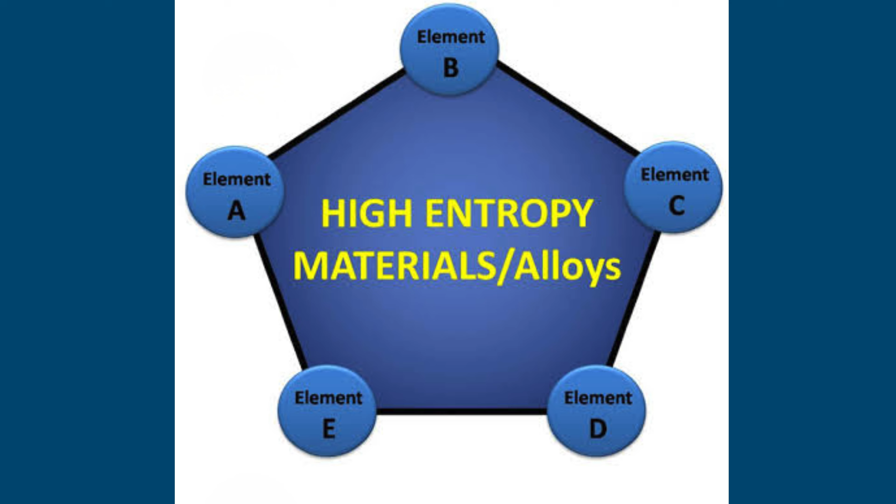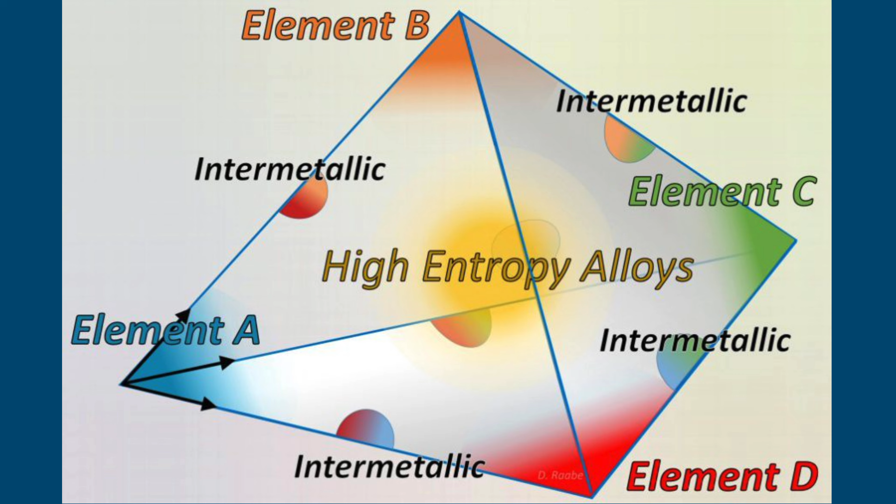High-Entropy Alloys, HEA, developed principally in the early 2000s, represent a different philosophy of alloy design. Instead of using one dominant metallic element with relatively small alloying additions, HEAs generally contain several principal elements, often in near-equiatomic proportions. This compositional complexity can produce unusual combinations of strength, ductility, corrosion resistance, wear resistance, and thermal stability. High-Entropy Superalloys, HESA, combine concepts from both classes, particularly the compositional complexity of HEAs, with the precipitation-strengthening strategies characteristic of conventional superalloys.

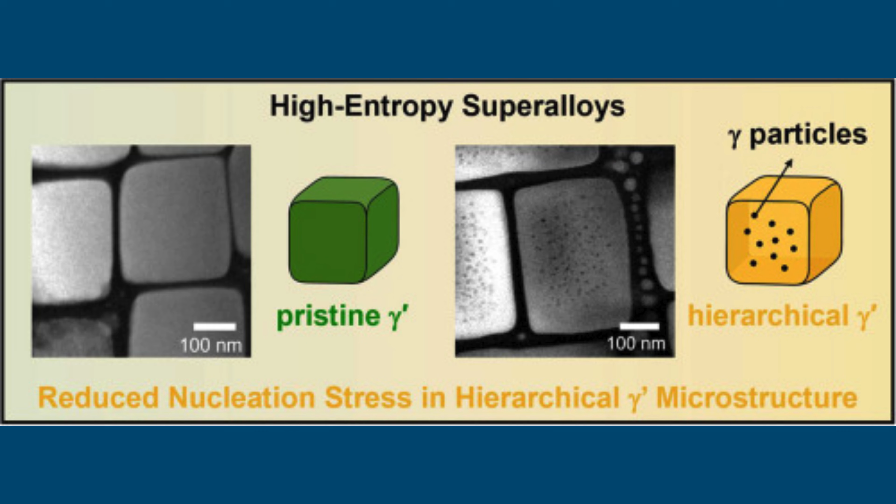Superalloys are commonly classified according to their principal matrix element into nickel, cobalt, and iron-based superalloys. Although their compositions differ substantially, they share the objective of maintaining useful mechanical properties at temperatures where conventional steels and light metal alloys undergo rapid creep or loss of strength.

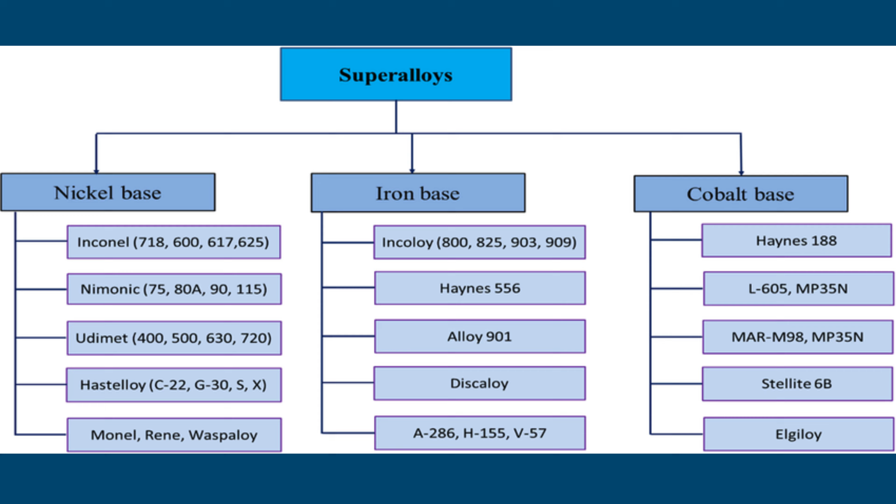Nickel-based superalloys.

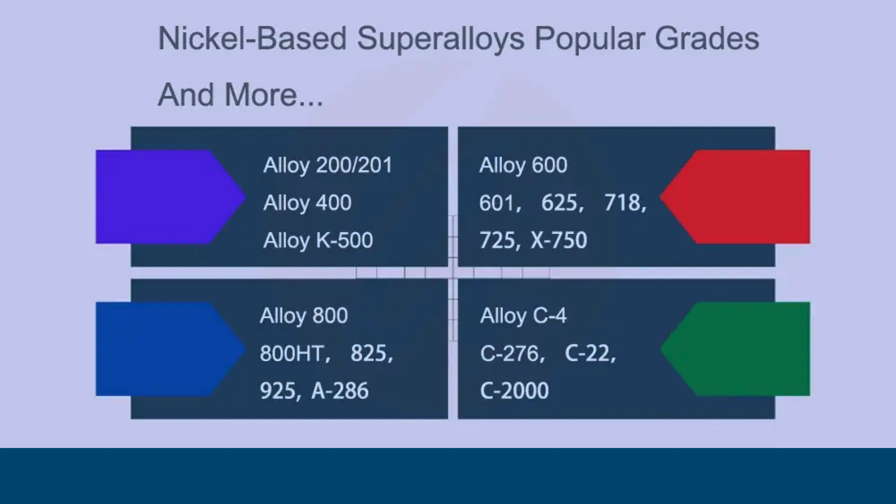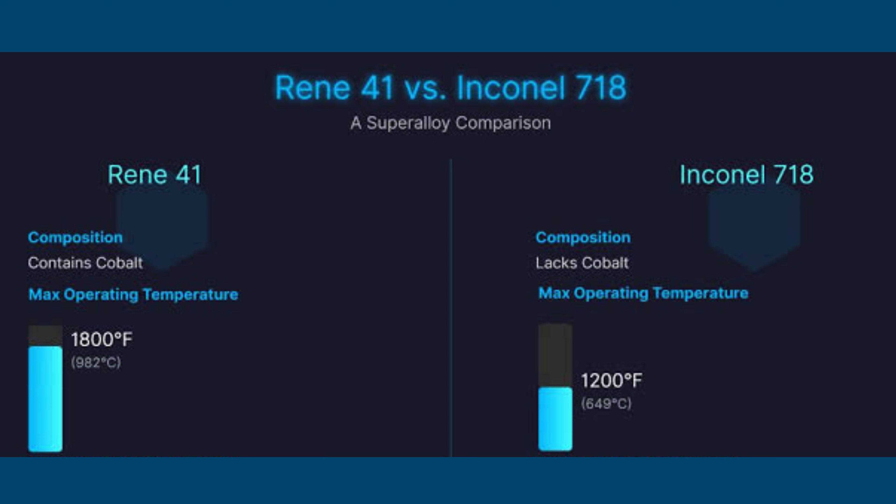Nickel-based superalloys are the most technologically important superalloys and are extensively used in the hot sections of aero engines and land-based gas turbines. Representative commercial families include Nimonic, Inconel, Rene, and CMSX alloys. They can operate at temperatures approaching or exceeding 800 to 1000 degrees Celsius, depending on composition, processing, cooling, and service conditions.

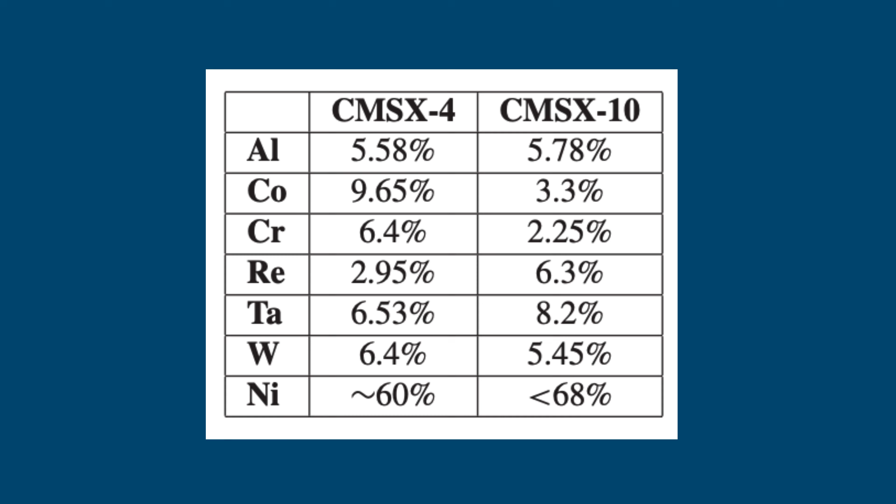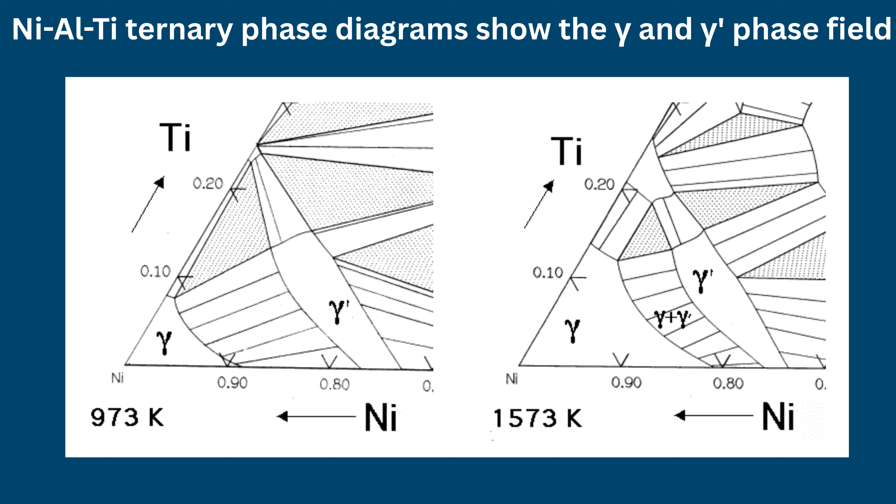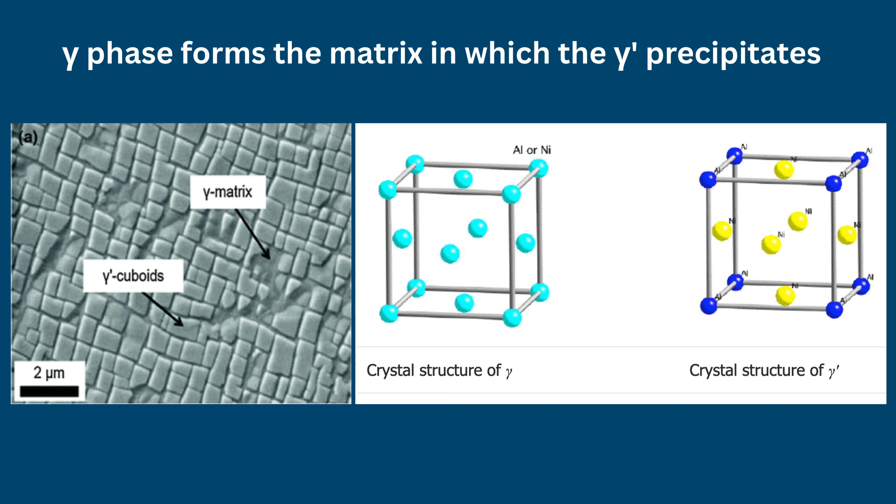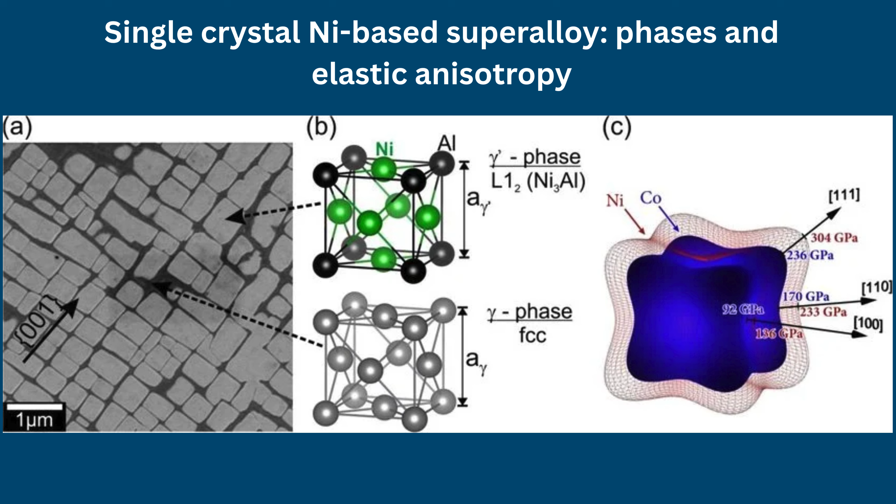The baseline material architecture of a superalloy relies on a two-phase equilibrium. It consists of a primary gamma matrix and secondary gamma prime precipitates dispersed within it. Their exceptional performance originates from a predominantly FCC gamma-nickel matrix, strengthened by alloying elements such as chromium, cobalt, molybdenum, tungsten, and rhenium. The most important strengthening phase is the ordered gamma prime phase, nominally Ni3 aluminum-titanium, which possesses an L12 structure and remains coherent with the gamma matrix.

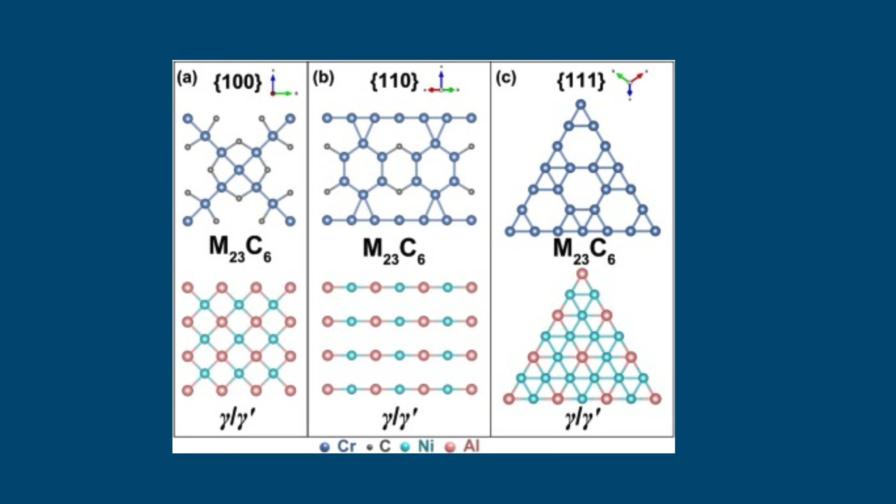In some alloys, particularly IN718, the ordered gamma double prime phase, approximately Ni3Nb, provides major precipitation strengthening. Carbides such as M23C6, M6C, and MC can additionally contribute to grain boundary and matrix strengthening.

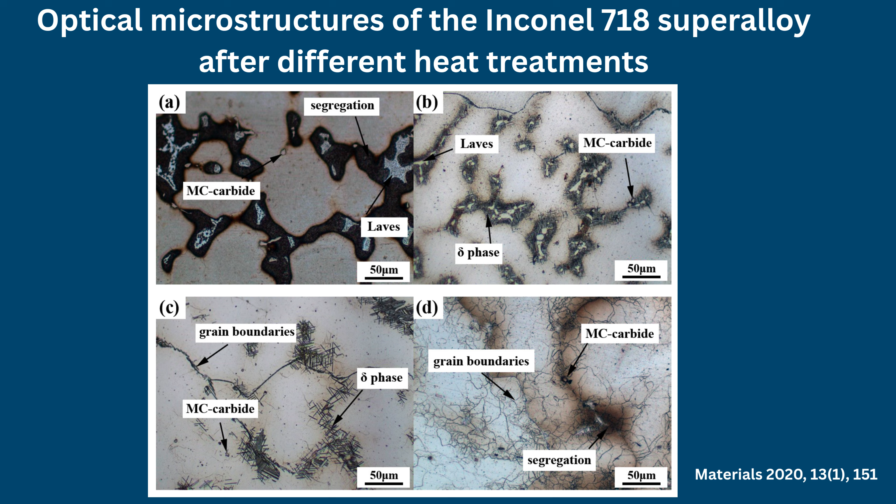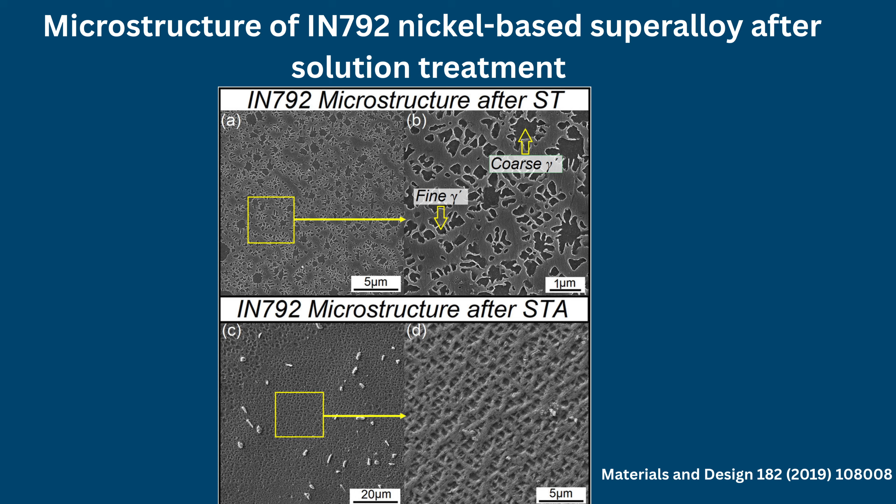The gamma/gamma prime microstructure is particularly important because gamma prime resists dislocation motion and retains substantial strength at elevated temperatures. Modern single-crystal turbine blade alloys exploit this microstructural principle while eliminating transverse grain boundaries, thereby substantially improving creep and thermal fatigue resistance.

Cobalt-based superalloys.

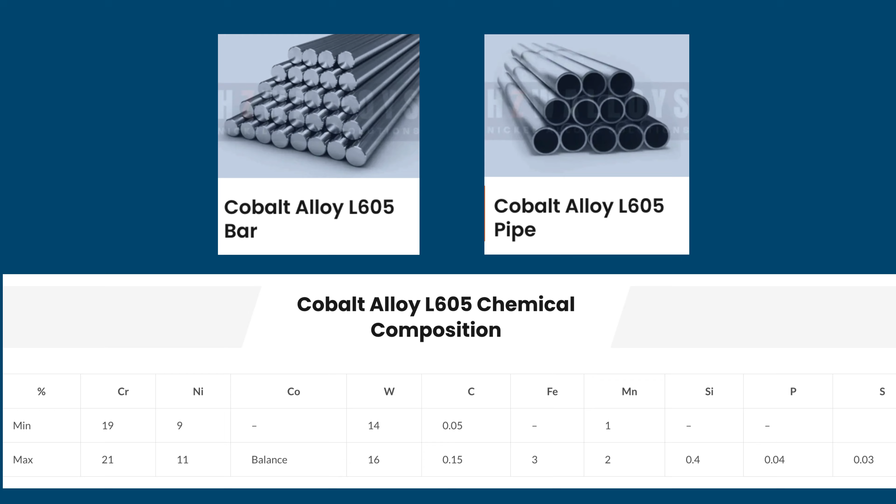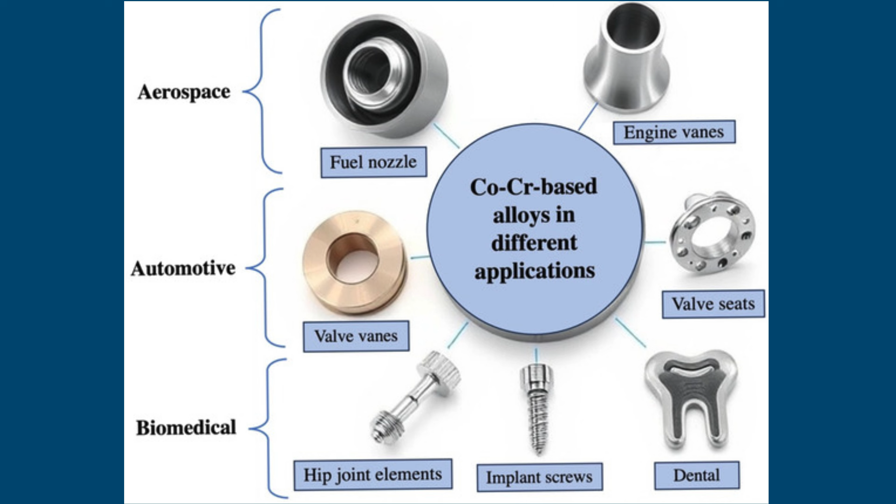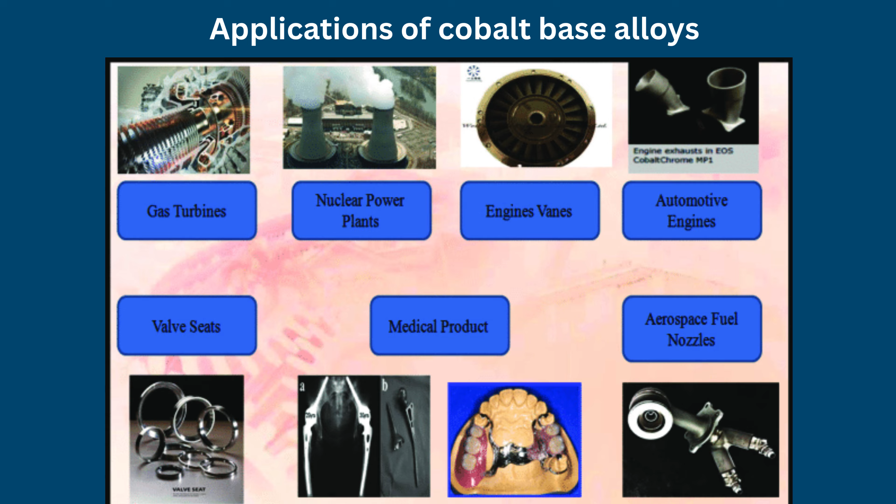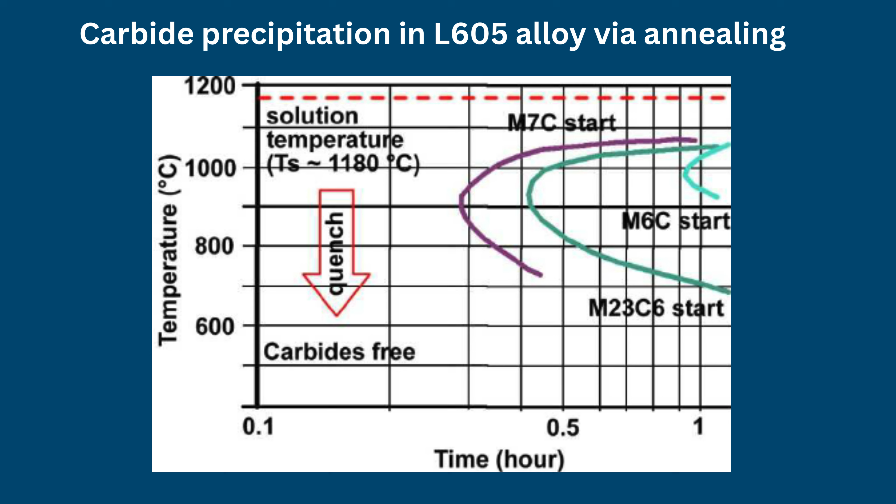They are valued for high-temperature corrosion and wear resistance and have historically been important for turbine vanes, combustion components, furnace hardware, and biomedical applications. Compared with conventional nickel superalloys, cobalt alloys traditionally rely more strongly on solid solution strengthening and carbide strengthening. Chromium promotes formation of protective Cr2O3 scales, while W and Mo provide solid solution strengthening.

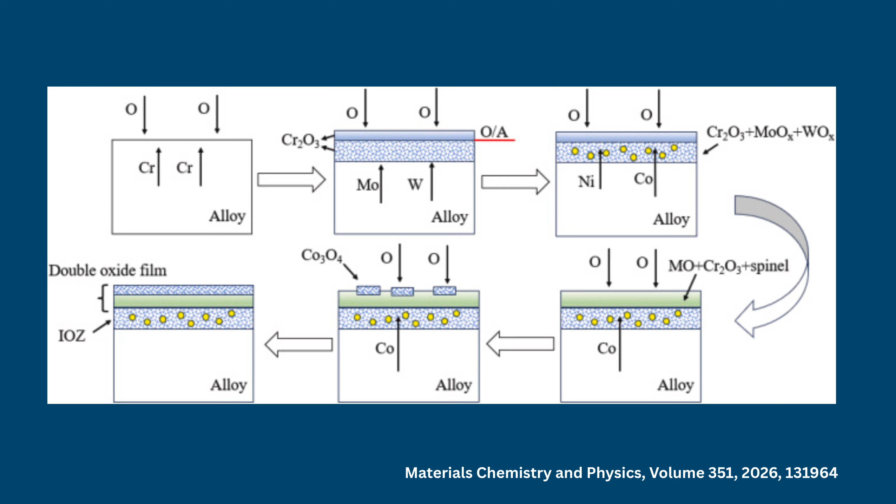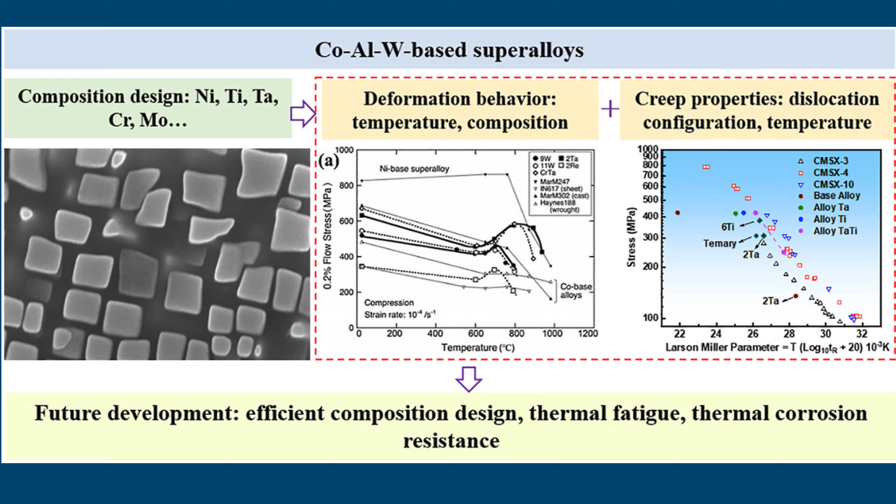Their relatively high melting temperatures and good hot corrosion resistance make them attractive for components exposed to aggressive high-temperature environments. An important modern development is the discovery of Co-Al-W-based gamma/gamma prime superalloys, in which an L12 Co3(Al,W) type gamma prime phase provides precipitation strengthening analogous to the gamma/gamma prime microstructure of nickel superalloys. These alloys demonstrated that the powerful precipitation strengthening concept of Ni-based superalloys could potentially be extended to cobalt-rich systems.

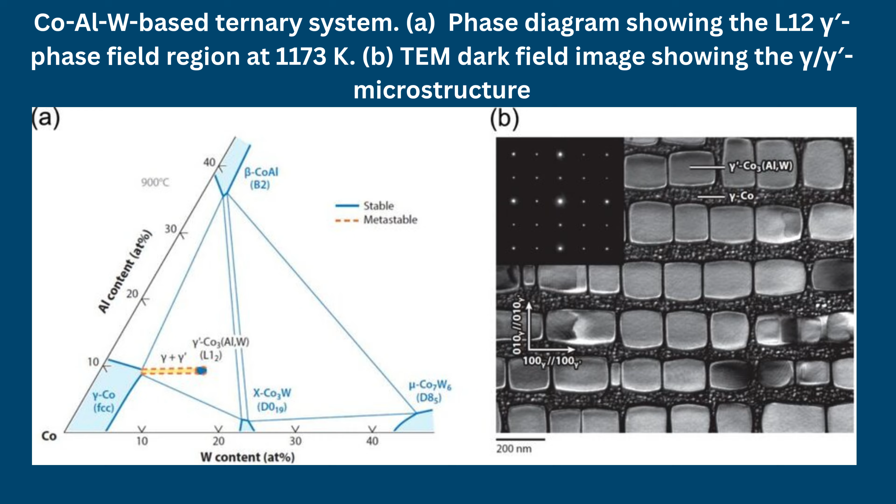Iron-based superalloys.

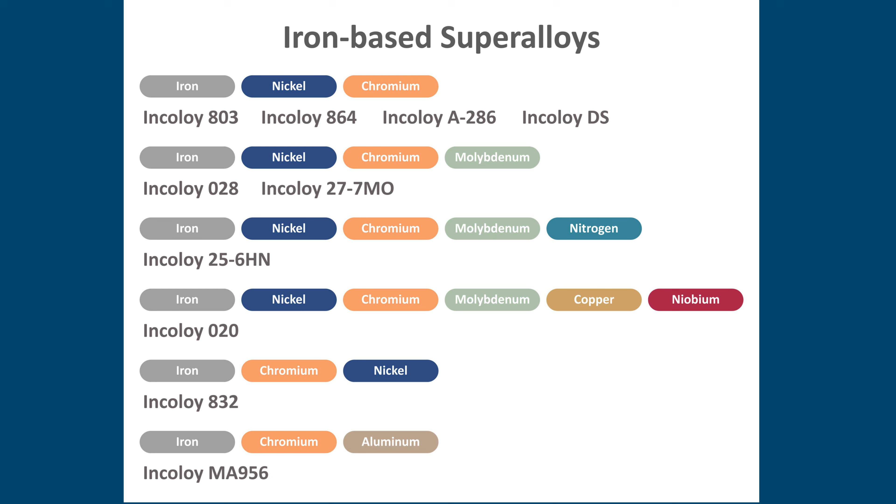Iron-based superalloys occupy an intermediate position in cost and high-temperature capability. They commonly contain Fe-Ni-Cr with additions such as molybdenum, titanium, aluminum, and niobium. Examples include A286, Incoloy 800, or Incoloy iron-nickel-chromium families, and Incoloy 825. A286 is a particularly important precipitation-strengthened iron-nickel-chromium alloy containing aluminum and titanium.

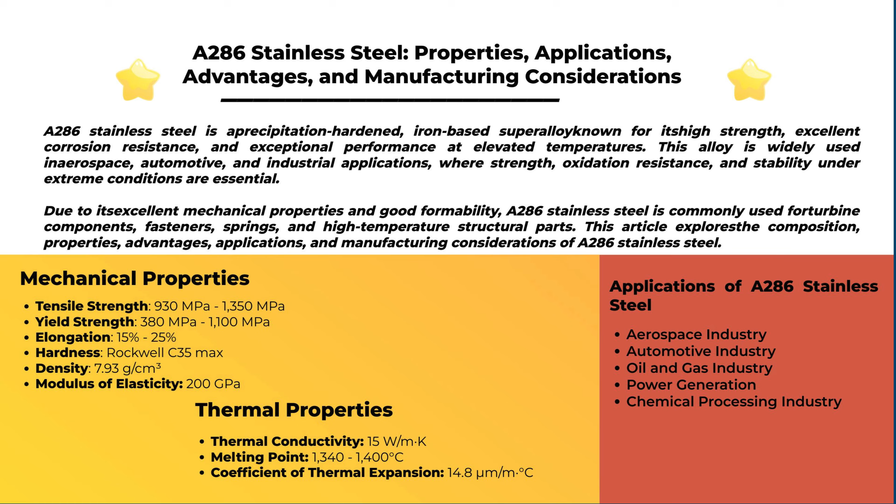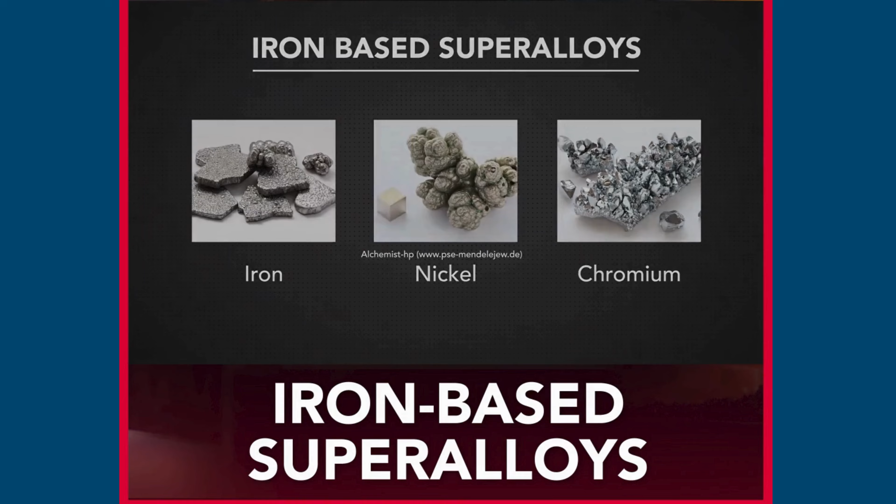Depending on composition, iron-based superalloys can employ solid solution strengthening or precipitation strengthening through gamma prime and, in some compositions, gamma double prime. They are generally used at lower temperatures than the most advanced nickel-based turbine alloys. Still, their lower cost and good combination of strength, corrosion resistance, and fabricability make them attractive for structural components, fasteners, chemical equipment, and power generation systems.

Principal strengthening mechanisms. The outstanding performance of superalloys results from several complementary mechanisms.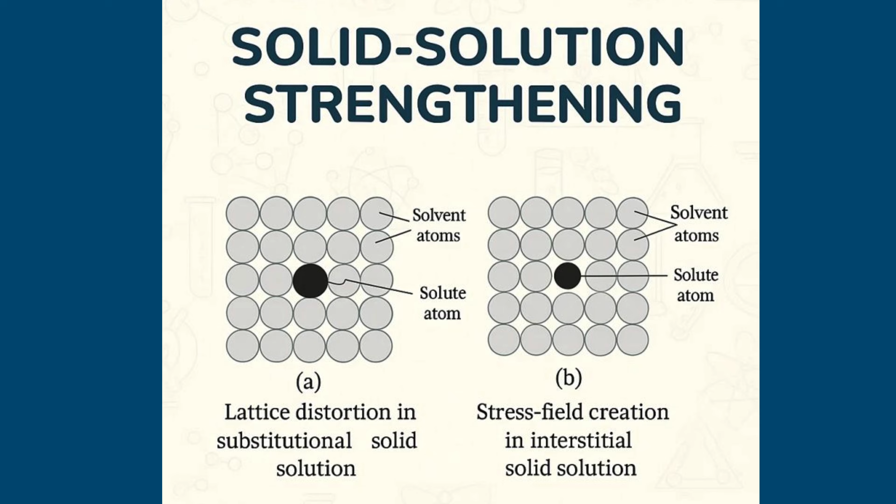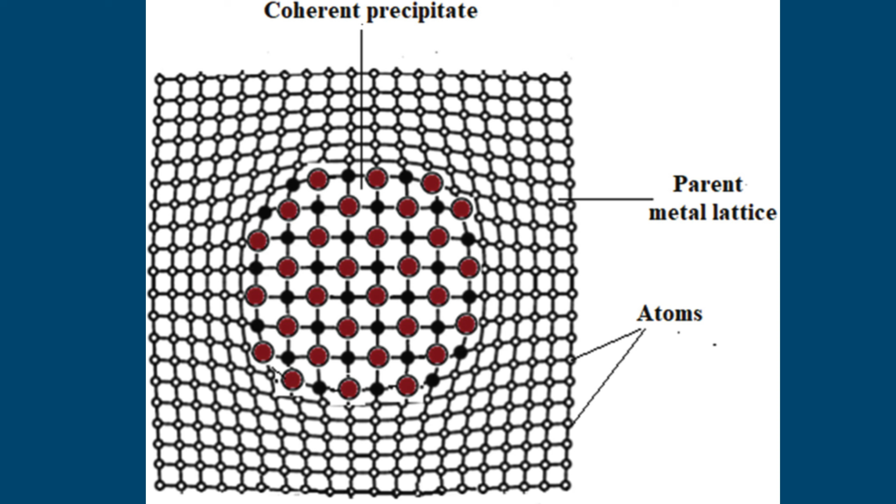Solid solution strengthening: large or chemically different solute atoms such as tungsten, molybdenum, rhenium, and chromium distort the crystal lattice and impede dislocation motion. Precipitation strengthening: fine coherent or semi-coherent intermetallic precipitates, particularly gamma prime and gamma double prime, strongly obstruct dislocation motion.

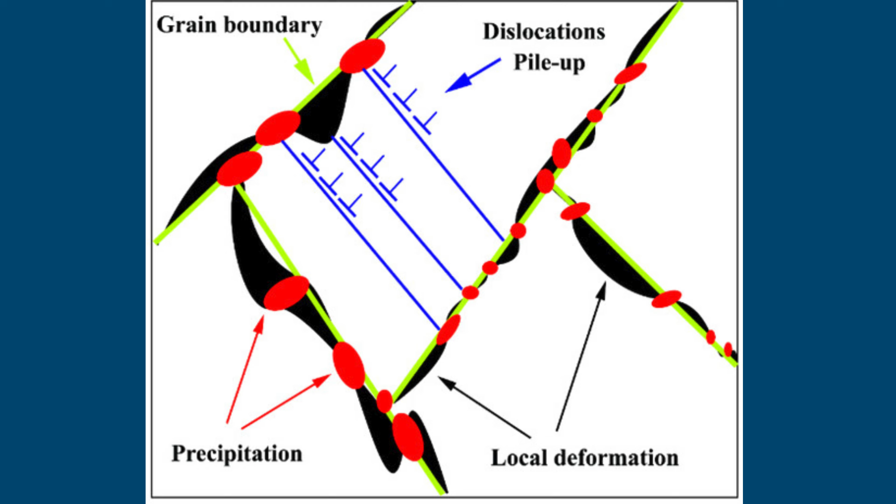Grain boundary strengthening: grain boundary carbides and controlled grain structures can suppress grain boundary sliding and creep. Conversely, eliminating grain boundaries through single crystal processing can provide major creep advantages in turbine blades.

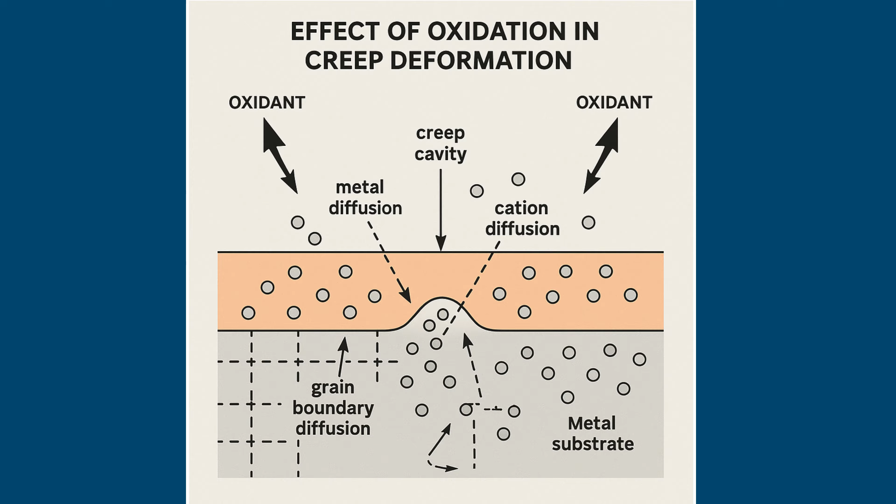Creep resistance: creep is controlled through stable precipitates, refractory element additions, optimized grain structures, and resistance to dislocation climb and diffusion. Nickel superalloys are remarkable because they retain creep strength at temperatures approaching a substantial fraction of their melting temperature.

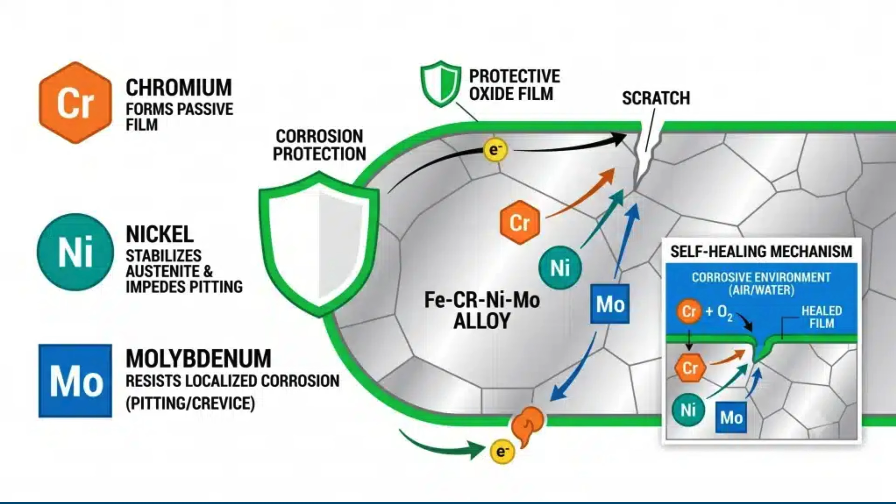Oxidation and corrosion resistance: chromium and aluminum are particularly important because they form protective oxide scales, principally chromium oxide Cr2O3 and alumina Al2O3, which limit further oxygen transport into the alloy.

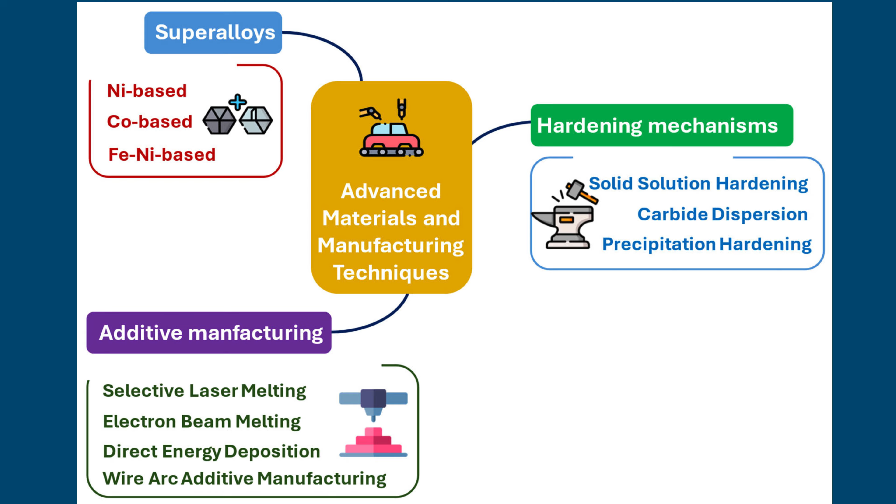Processing and limitations of superalloys. Superalloy performance is strongly dependent on processing history. Conventional routes include casting, forging, solution treatment, aging, powder metallurgy, and, increasingly, additive manufacturing. Directional solidification and single crystal casting are especially important for advanced turbine blades.

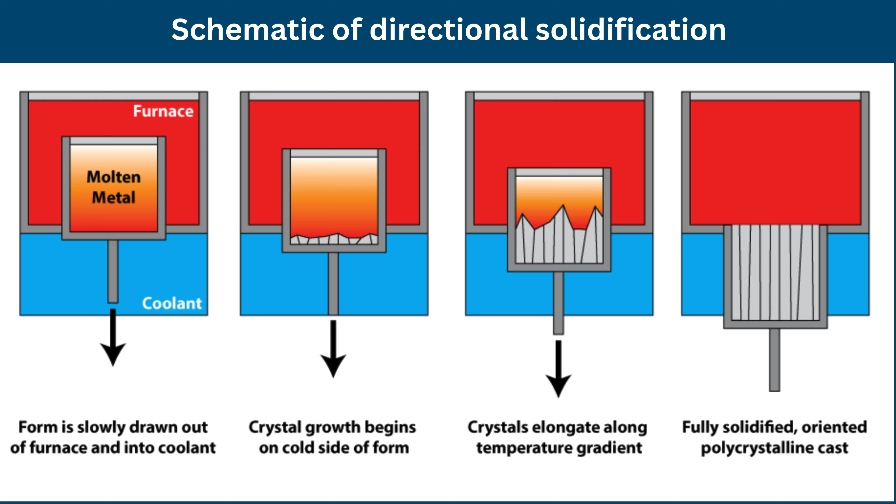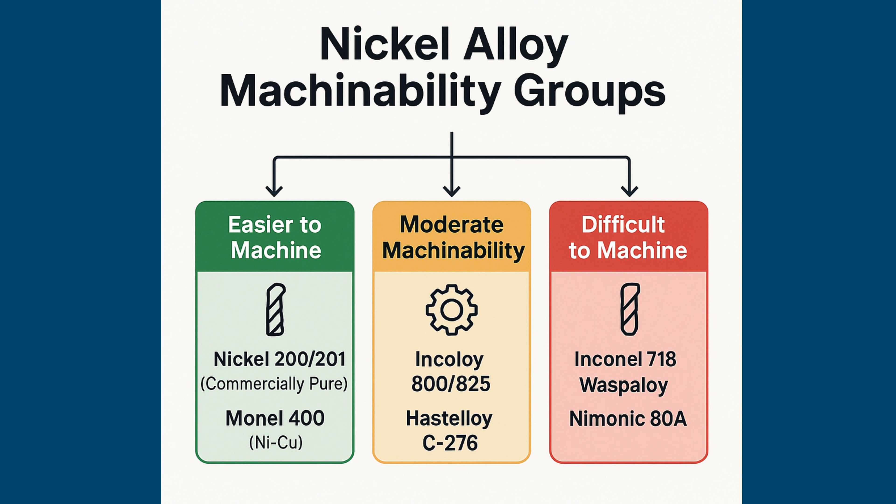The same alloy chemistry that produces exceptional high-temperature performance can also create processing difficulties. Nickel-based superalloys, for example, are difficult to machine because of their high strength, low thermal conductivity, work hardening, and tendency to generate substantial cutting temperatures.

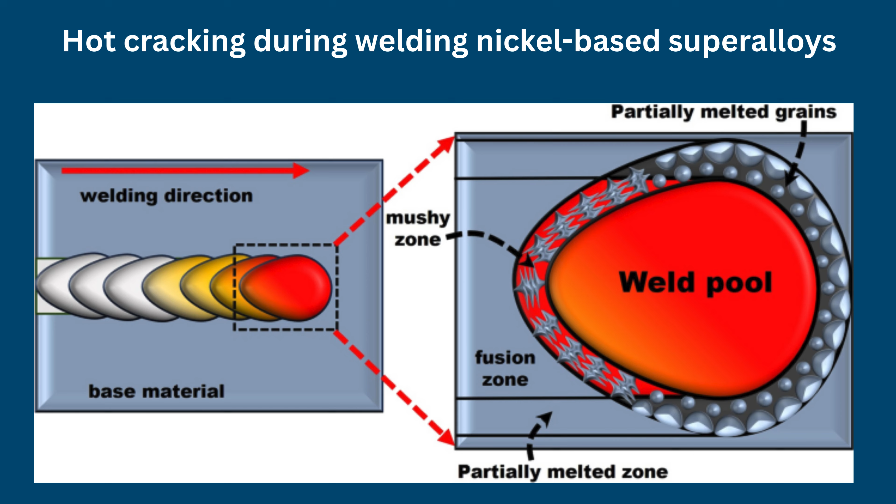Welding can also be challenging because precipitation-strengthened alloys are susceptible to heat-affected zone liquation and hot cracking. These limitations motivate continued development of advanced joining, machining, coating, repair, powder processing, and additive manufacturing technologies.

High-Entropy Alloys.

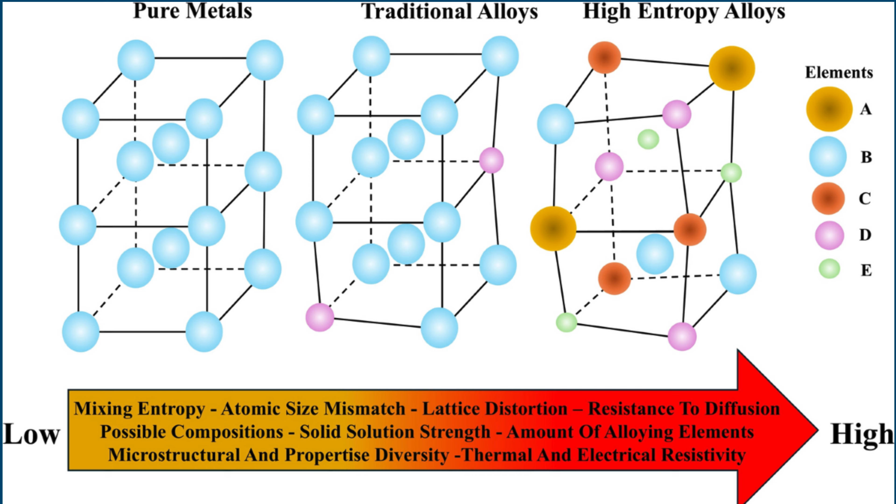HEAs introduced a major change in alloy design philosophy. Rather than defining an alloy around a single base metal, HEAs generally contain 5 or more principal elements, frequently in concentrations between approximately 5 and 35% each. The well-known Cantor alloy, equiatomic chromium, manganese, iron, cobalt, nickel, is a landmark example.

The original HEA concept emphasized high configurational entropy of mixing. Delta S mix equals minus R sum of Xi natural log Xi. For an equiatomic 5-component alloy, the configurational entropy is approximately 1.61 R.

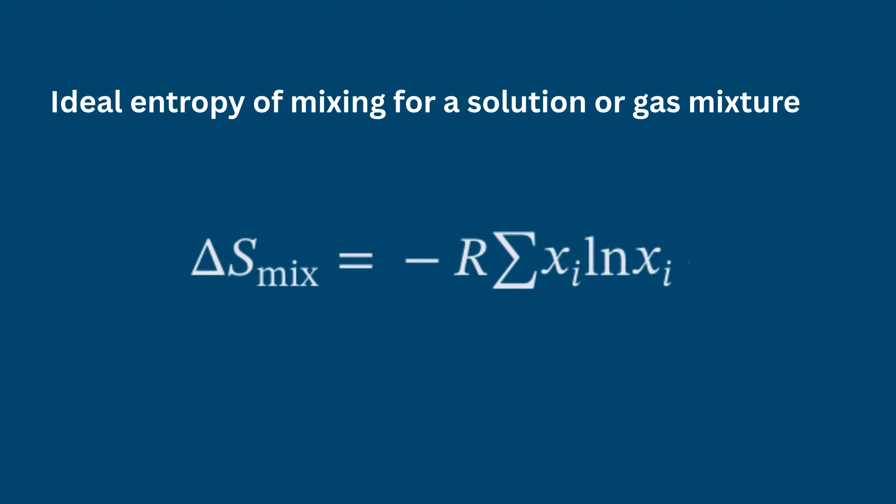High entropy can favor disordered solid solution phases relative to some competing ordered compounds, although modern understanding recognizes that entropy is only one factor governing phase formation. Enthalpy of mixing, atomic size mismatch, valence electron concentration, kinetic effects, and processing history can be equally important.

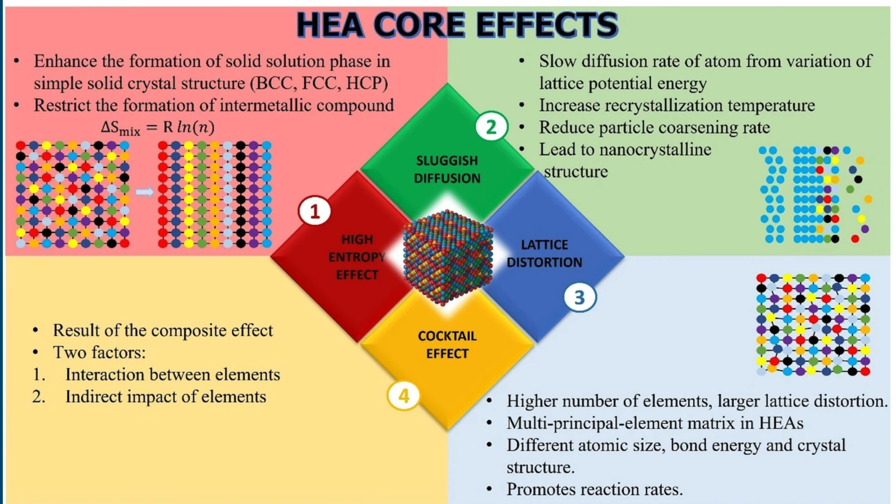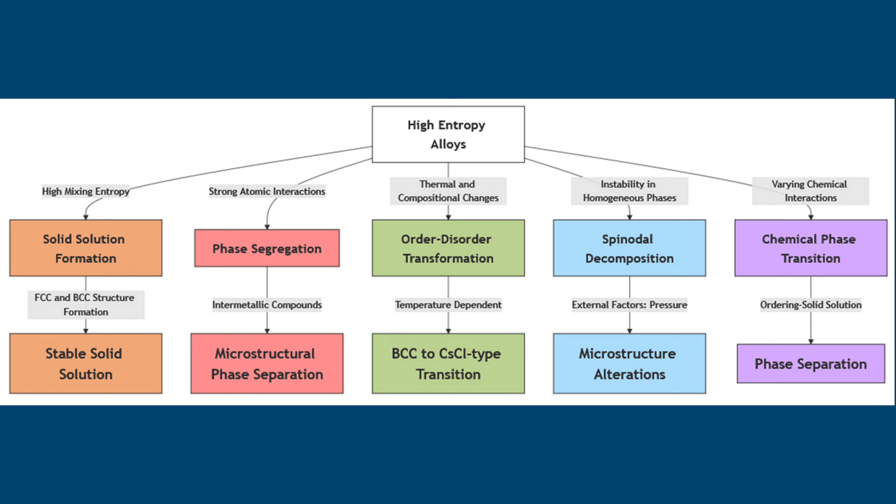Importantly, not every HEA is a single-phase solid solution. HEAs may contain FCC, BCC, HCP, ordered B2 or L12 phases, intermetallic compounds, or multiphase microstructures. This compositional flexibility is now deliberately exploited to optimize properties rather than maximize configurational entropy.

Why HEAs are attractive.

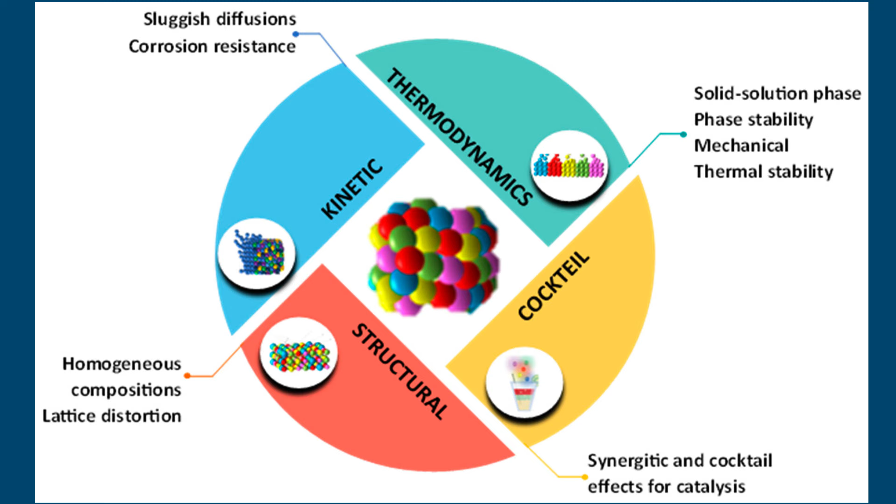HEAs can exhibit unusual combinations of mechanical and environmental properties. Depending on composition and microstructure, reported characteristics include high strength, good fracture toughness, excellent wear resistance, corrosion resistance, thermal stability, and useful mechanical properties at cryogenic or elevated temperatures. The Cantor alloy is particularly notable for its exceptional low-temperature toughness.

Other HEAs, especially refractory metal-containing systems such as niobium, molybdenum, tantalum, tungsten, and molybdenum, niobium, tantalum, vanadium, tungsten type alloys, have attracted attention for high-temperature structural applications because of their high melting temperatures and strength.

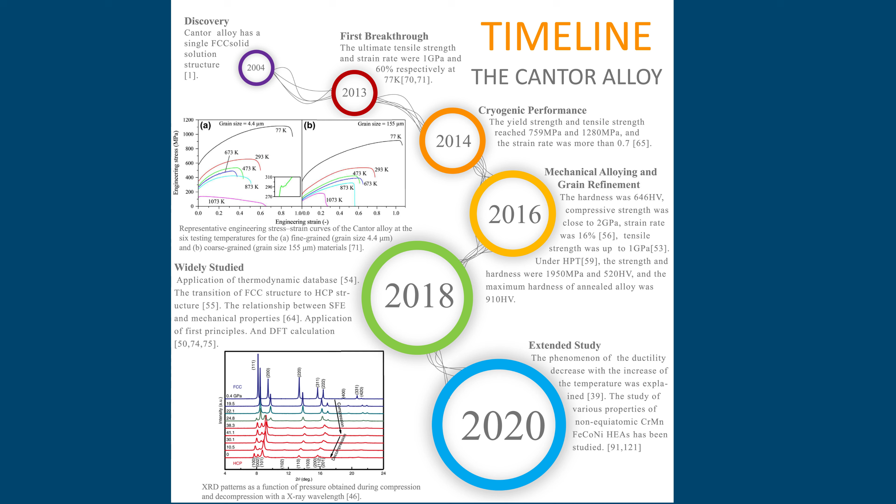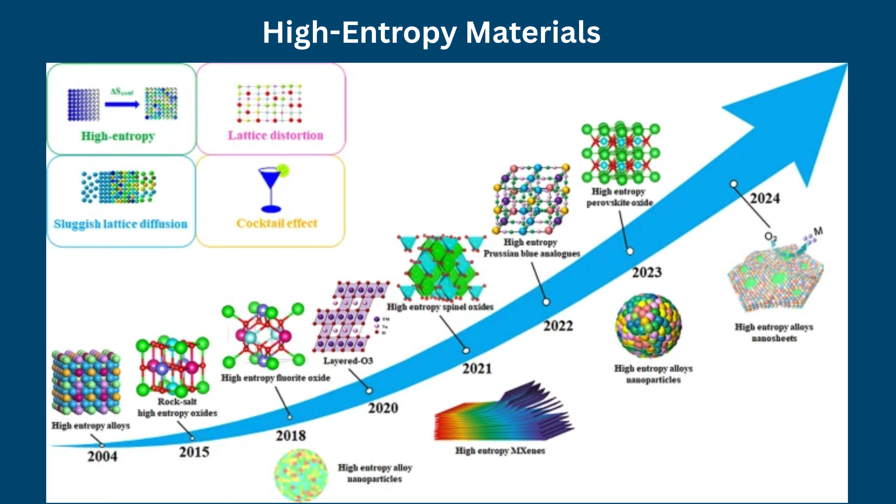However, the properties of HEAs are highly composition and microstructure dependent. The concept of a universal high-entropy effect should therefore not be interpreted as guaranteeing superior performance. Phase constitution, defects, grain size, precipitation, and processing remain decisive.

High-Entropy Superalloys.

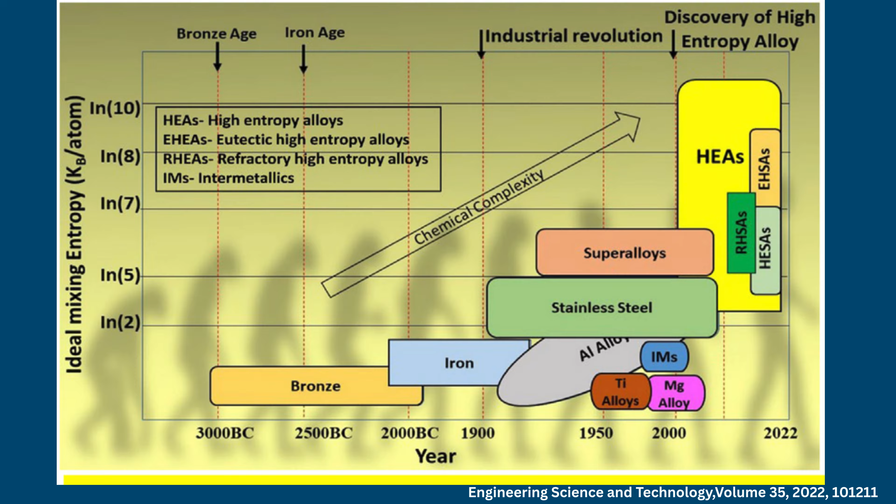High-Entropy Superalloys, HESA, seek to combine the advantages of HEAs with the well-established strengthening architecture of conventional superalloys. A particularly important strategy is to develop an FCC gamma matrix containing ordered L12 gamma prime precipitates, analogous to the gamma/gamma prime microstructure of Ni-based superalloys.

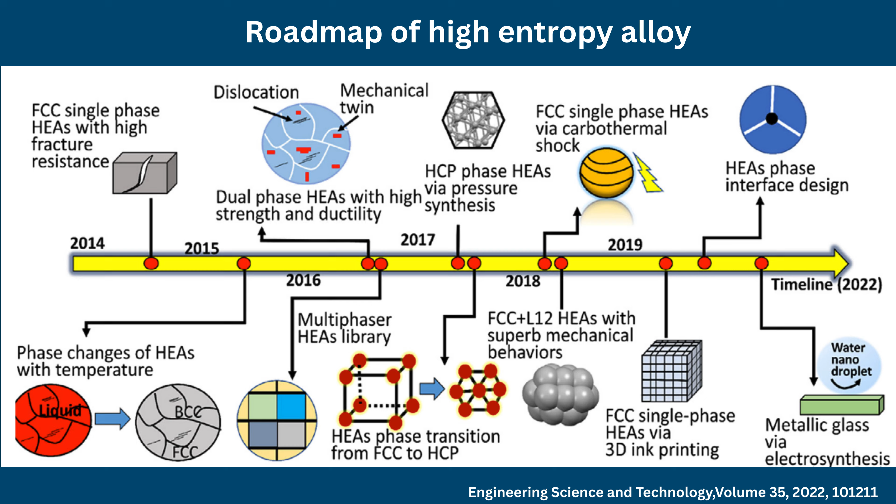Typical HESA compositions may incorporate nickel, cobalt, iron, chromium, and refractory elements such as molybdenum, tungsten, and tantalum. The design objective is to obtain a chemically complex matrix while retaining a stable population of strengthening precipitates.

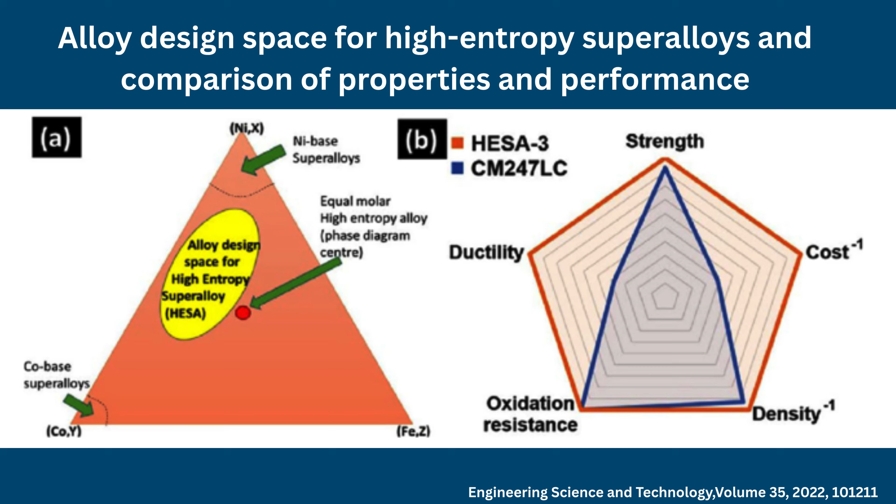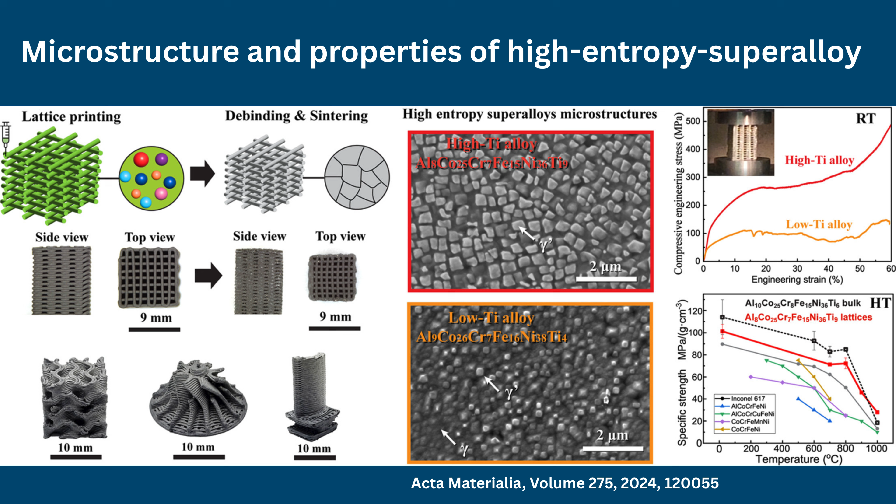Thus, instead of relying solely on configurational entropy, HESAs use solid solution strengthening, precipitation strengthening, grain boundary engineering, and oxidation control simultaneously. This strategy is particularly attractive for temperatures approaching or exceeding 1,000 degrees Celsius, where conventional superalloys face increasing problems with oxidation, precipitate coarsening, phase instability, and loss of creep strength.

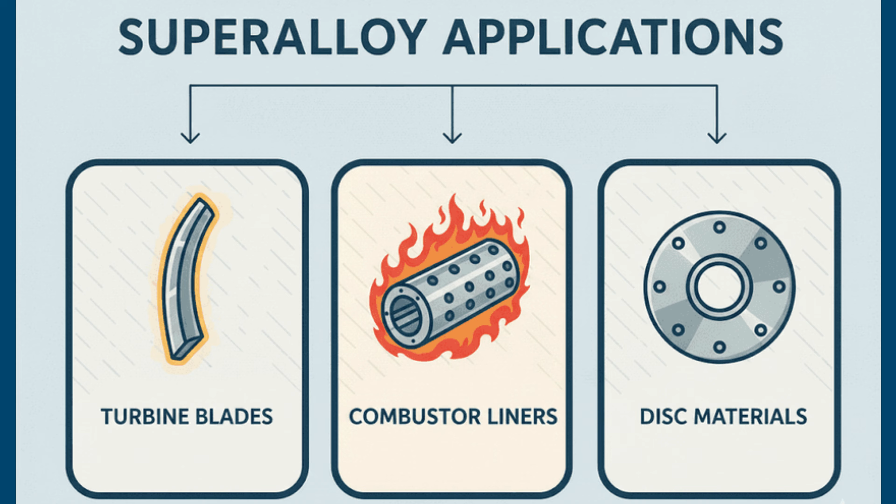Future outlook. Superalloys remain the benchmark materials for demanding high-temperature turbine applications because decades of alloy development, processing optimization, coatings, and component design have produced highly reliable materials.

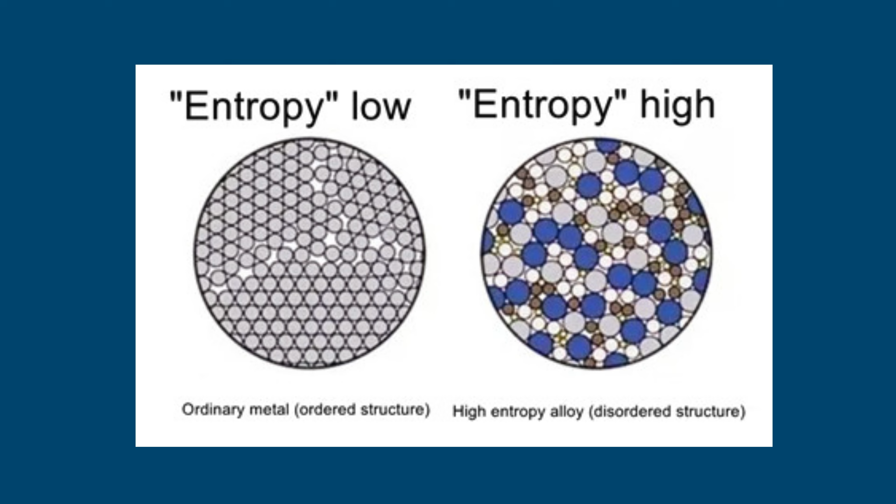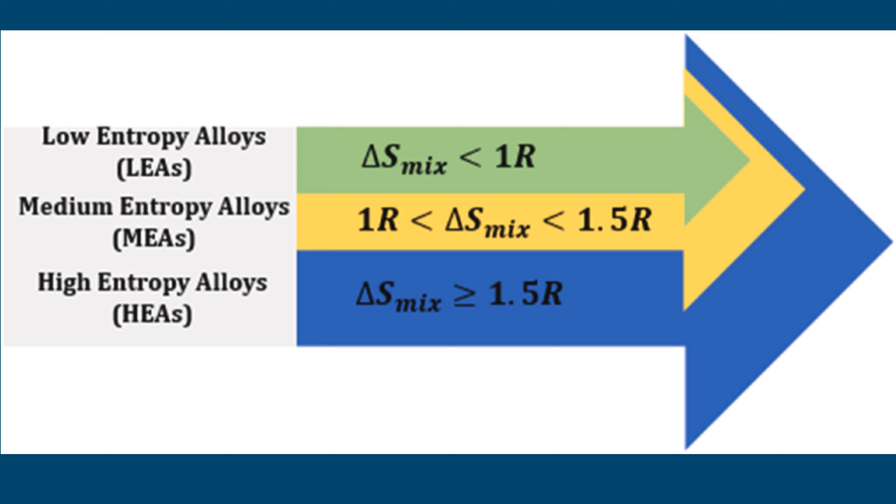HEAs and HESAs represent a broader design space, rather than an automatic replacement for conventional superalloys. Their principal opportunity lies in discovering combinations of strength, ductility, thermal stability, oxidation resistance, and damage tolerance that are difficult to obtain using conventional alloy design strategies.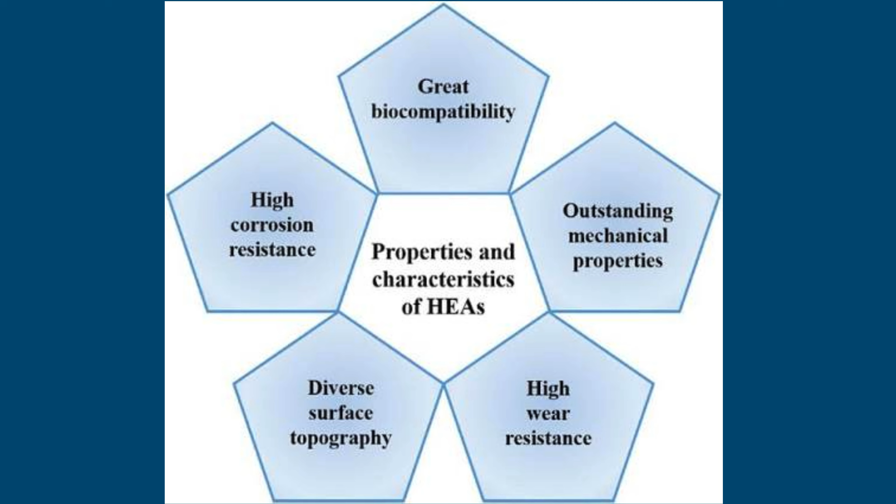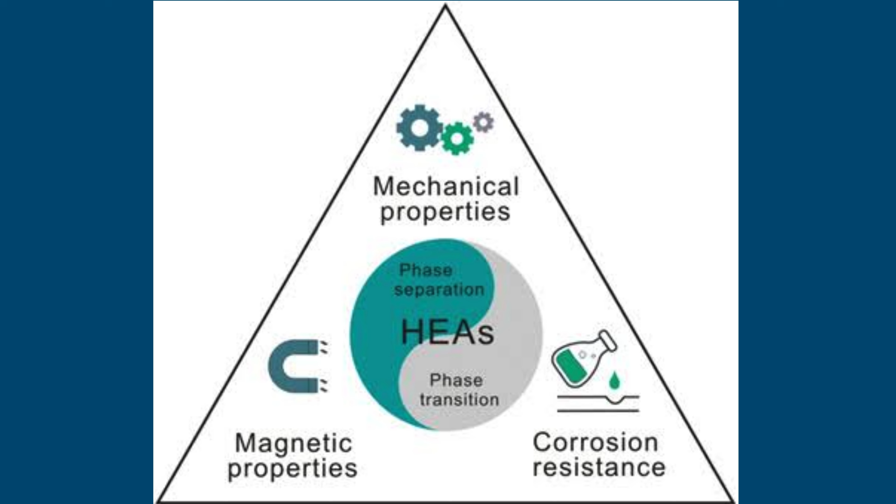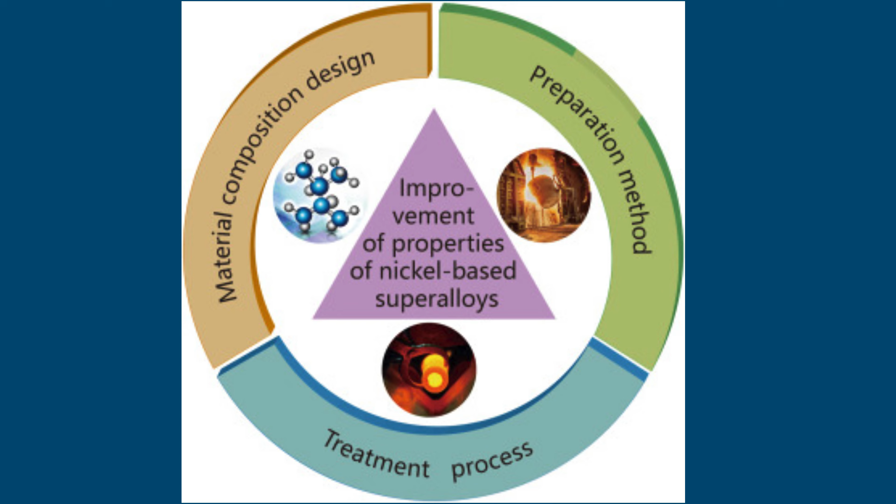The principal challenges for HESAs include compositional complexity, expensive or critical alloying elements, segregation, manufacturability, long-term phase stability, oxidation/corrosion behavior, and establishing reliable processing structure-property relationships. Future progress will therefore depend on integrating thermodynamic modeling, machine learning, advanced characterization, additive manufacturing, and targeted microstructural engineering.

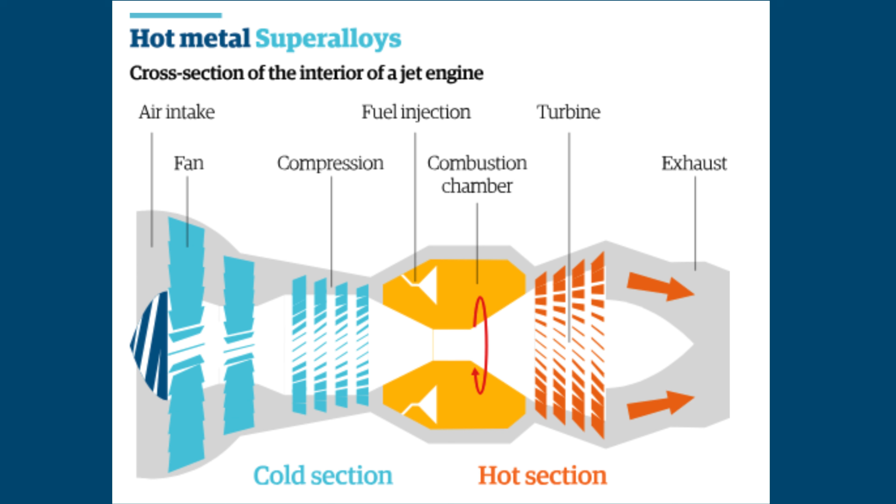In summary, superalloys represent the mature state of high-temperature alloy engineering, whereas HEAs provide a fundamentally expanded compositional design space. HESAs attempt to bridge these approaches by combining multi-component alloy chemistry with the precipitation-strengthened gamma/gamma prime architectures responsible for the exceptional performance of modern nickel-based superalloys.